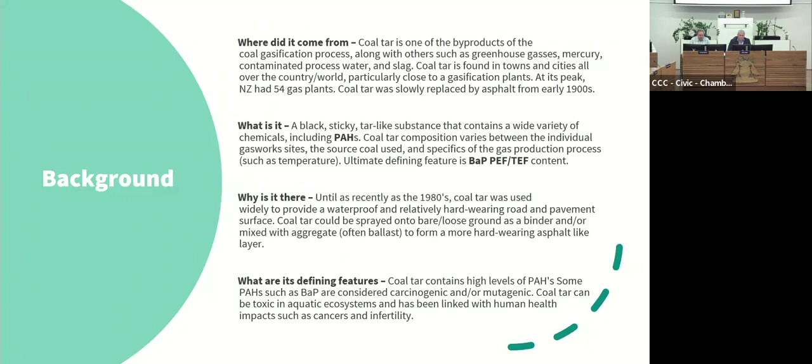So it's a very useful material. Unfortunately, it's not very healthy. It contains a lot of PAHs, which is the short term for polycyclic aromatic hydrocarbons. I'll touch on those a little bit later as well in Janine's section, but basically they're not very good for you.

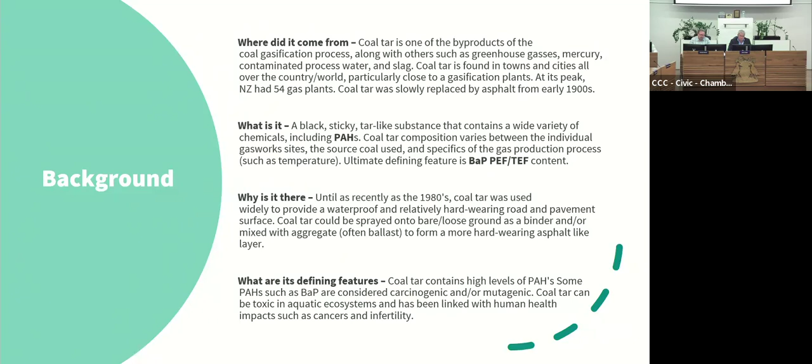The key defining feature of the strength of any given coal tar is its BAP content. BAP means benzoapyrene, which is a type of PAH. So I'll just skip on to the next page here - not with this. Here's a list of a lot of the PAHs that are found in coal tar. You don't need to read them all, the nuts and bolts of it is there's a big long list of PAHs.

So on the left is some of the constituent PAHs that are found in coal tar. The table on the right is representative of the most harmful fractions of PAH. So when we find coal tar in a road and we need to excavate it and dispose of it, at this stage in this country, the only way to dispose of coal tar at the moment is to put it into a landfill. And to determine which landfill we're able to send it to, we need to know how toxic it is. The measure of that is its content of benzoapyrene, BAP.

The figure there gives a calculation factor of the other most toxicant contents of coal tar, and they are added together to give a total which is called BAP, PEF, or TEF, which if you look at the table on the left-hand side, about halfway down, you can see there's a PEF and a TEF in brackets. So those numbers are what we look at when trying to assess how toxic, how harmful coal tar is, and then how we need to manage it and where we need to dispose of it.

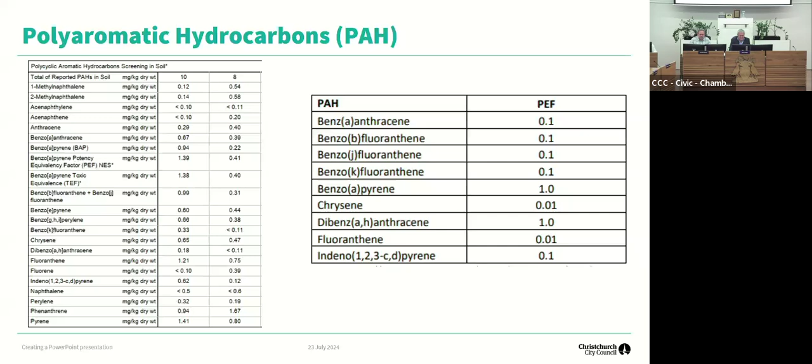So these slides are around the regulatory framework within which we need to manage coal tar. So what have we got? Coal tar, actually, that's an interesting point. Coal tar is a very strong compound, polyaromatic, polycyclic aromatic hydrocarbon. Hydrocarbons are made up of carbon and hydrogen atoms. And in a polycyclic ring is multiple, multiple rings of hexagonal carbon framework surrounded by hydrogen atoms, and it's very, very strong. It's very persistent. It doesn't break down very easily.

That's what makes it, I guess, such a contaminant of concern, is that it's very persistent. PAHs have been identified as being carcinogenic, mutagenic, genotoxic, and a reproductive toxicant, which basically means it can give you cancer. It can change your body at a genetic level, and it can affect people and organisms' ability to reproduce. Key point on this slide is that coal tar is referred to as a non-threshold contaminant. So there's no safe level of contamination. Any amount of contamination can cause problems in organisms.

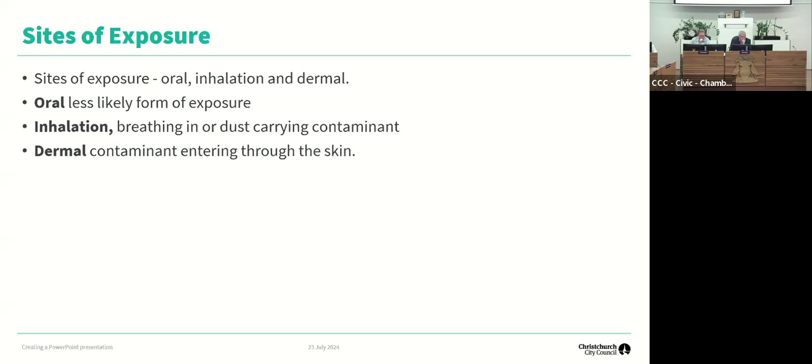From there, that small particulate matter can be ingested by filter feeders or adhere to plant life, which is then consumed by other organisms, and it bioaccumulates up through the food chain, causing issues we see in fish and other organisms such as tumors, cataracts, and fin erosion. It's easily absorbed in benthic environments.

This is where we're touching on how it's regulated. Under the Resource Management Act, for contaminated land, district councils issue resource consents for managing contaminated land. Christchurch City Council has issued a global consent to ourselves to disturb and dispose of coal tar where and when we find it.

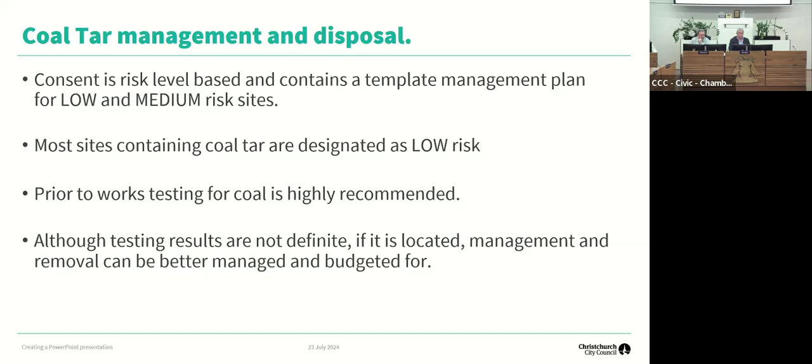Another regulator, of course, is Environment Canterbury. ECan manages, discharges, or authorizes and regulates discharges of contaminants to land and to water, or to ground where it may enter groundwater.

We don't have any—council does not currently hold, I don't think, any consents from ECan for any other options of managing coal tar other than disposing of it to an authorised landfill. So at this stage, our options are quite limited.

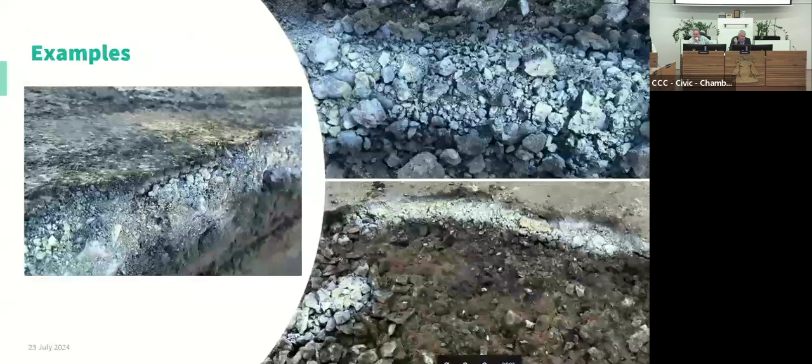So where you can see the white paint that's been sprayed on there, you can use an acrylic-based paint to spray on a surface where you suspect coal tar. If there's no coal tar present, that white paint stays white. But if the paint turns yellow, has a yellow discoloration, that indicates there's coal tar present. So it's a very quick test, and you can see in the photo in the bottom right corner where there's some yellow patches in the white paint.

So it's a very quick litmus test, as you say, of whether the coal tar is present or absent. However, that's purely presence and absence testing. You need to do laboratory sampling to determine the strength of the coal tar and then work out where you can dispose of it.

So I'm just looking at, say, that's on Innes Road, and you've dug down and found it, sprayed it with the white paint and there's little dabs of yellow there. Do we then stop, or do we have to send it away to get proper testing to know where to dump it? I'm just looking at how much time a road is open and we're not getting anywhere.

Again, a very good question. Thank you very much. In an ideal world, before we do works in a road, whether it's for the roading surface itself or 3 waters replacements, etc., we'll go along and do potholing into the road pavement to see what sort of materials we're dealing with.

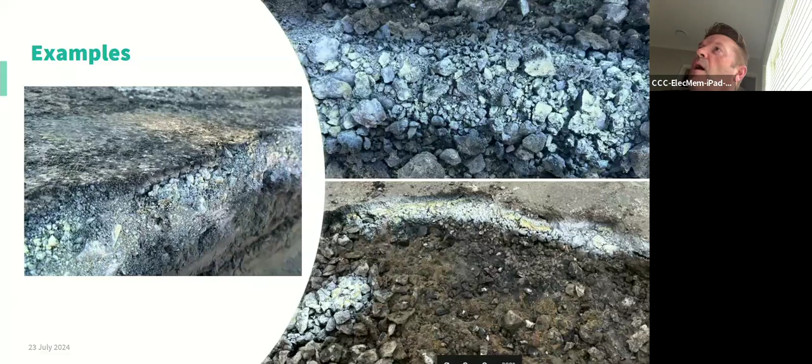Yeah, okay, I think I'm asking it wrong. Why have we gone to suddenly dealing with coal tar the way we do when it's only a potential link to cancer? It's not like asbestos where it's pretty clear cut - you can get asbestosis, but you can work with coal tar every day of your life and not get sick. That's true, but coal tar is a non-threshold contaminant, meaning there's no safe amount of exposure, like alcohol when you're pregnant - they have no limit.

Okay, I've got a lot of questions, and I'm really keen on getting down to the bit where you're going to suggest how we can play with it differently and save ourselves a fortune. Okay, Tim, yeah, thank you.

I was around when ECan did the HAIL sites, and that was an absolute dog. It seemed they just used old photos of market gardens, then went around and told everyone with properties in those old areas that they had HAIL sites. The angst caused in the community was horrendous, and we ended up doing more than ECAN to try and relax people. I don't want us to get into that situation. So how are we going to manage the concern this will raise - not a financial concern, but we don't want people suddenly running around saying 'oh my God, we've got coal tar being cut up in the dust.' So how are we looking at that? Are we going to talk about ways to relax it a wee bit, or what?

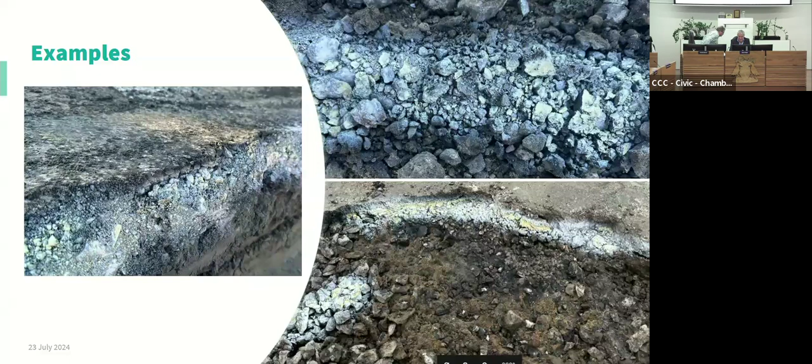Right, I'll try and whiz through these bits quickly. So Three Waters have given us some slides here, which are quite interesting because they talk about the cost of testing, which I think is partly in answer to your question. So they take a risk-based assessment to determine which roads need design investigation, and then they do that during design.

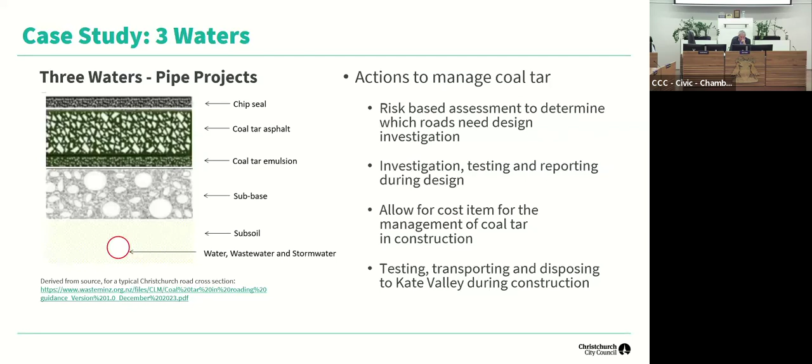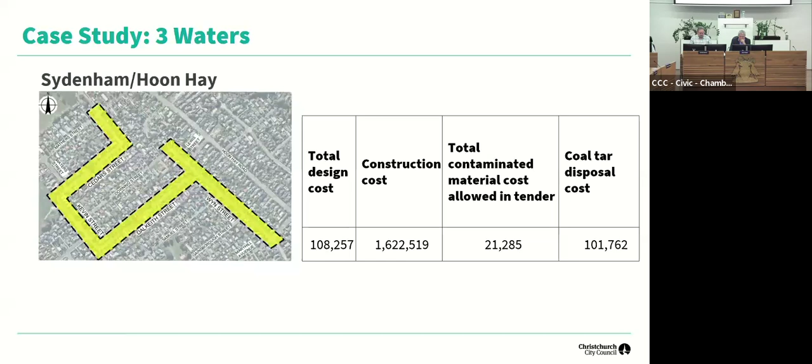The next one I think is really interesting because it covers the cost of the testing in design. In some of those, it's up to 10% of the design cost is the investigation of coal tar. So it's an expensive thing to do. It's not something you'd want to do everywhere because it will bump up the cost of every single job we do. It's just digging boreholes in the road as you go along before you start the job, sending it off to laboratories and so on and so forth.

So the risk-based approach is probably the best, but it means anything that's risk-based, sometimes you'll get it wrong. And that's the nature of taking that kind of approach, I think.

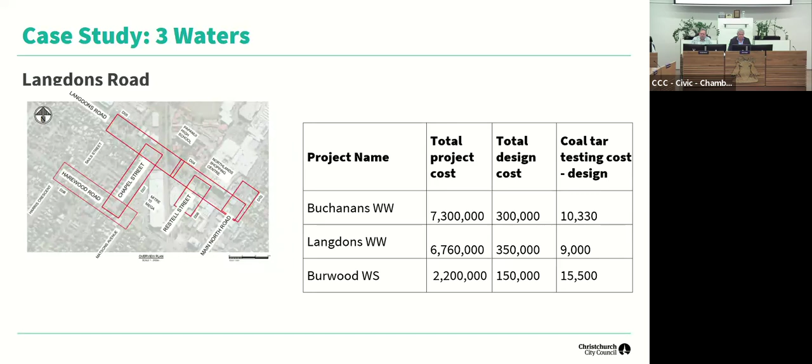So I'll go into Innes Road. This is a bit of a warts and all probably feedback.

Test pits and specification developed by designer. The sampling was poor. When we talk about sampling, we do test pits to find out all sorts of things - quite often we use them to find out where utilities are, and while we're there we test for coal tar. In this particular example, the people doing the sampling didn't take multiple samples, and because they were taking trenches in places where they were looking for utilities, these were obviously areas where the coal tar had been taken out already and moved away. So we end up with quite an unrepresentative sample, I think, in reality. Based on that, we thought we needed about $250,000 for disposal of coal tar.

Once they started working on the water main, they smelt it. We did much wider testing, and it ended up being about 1.3 million for disposal. We were somewhat up against the clock with this because we needed to finish the surfacing in the sealing season.

But what option did you have once you found it? Well, possibly that's the thing. But at that point, we could have come back and discussed it with you. But once you've opened up the road, there isn't really any other option than to just keep going, is there?

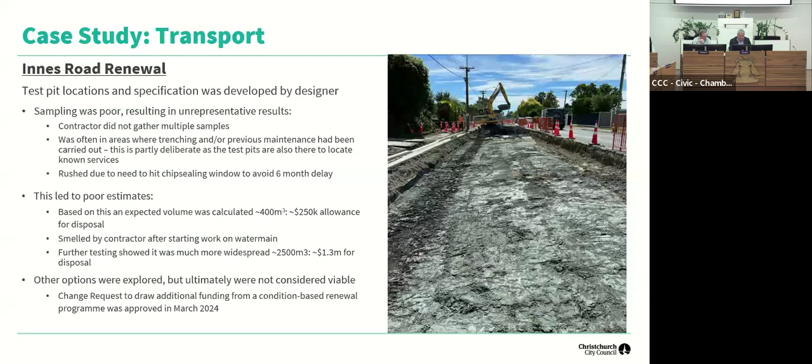So in terms of coal tar management options, there probably wasn't that big an option here. But the most obvious thing to do is, can you leave it where it is? Can you build the job somewhere else or do something else? It requires you to not end up disturbing it.

I've got Wheels to Wings at the bottom there. We've done extensive coal tar testing for Wheels to Wings, and we've found coal tar in a small number of areas, not particularly extensive. Possibly we can look at other designs for separators in that area so that we don't have to disturb the coal tar. So there are options if you can find it early and know where it is.

Can it be disposed of on site? There are occasionally some options to wrap it and rebury it. It's not really an option in a road because obviously they're utility corridors and people are going to have to come back and dig it out again at some point. But they are options in some other places, parks and so on.

You're only digging the road up because it's buggered, so you can't really bury it anywhere. Well, exactly, yeah. And it's probably only something you can do in relatively small scale as well.

Off-site disposal, location and cost. Mark touched on that earlier, but it depends on the concentration. It can go to all sorts of different places, some of which are incredibly expensive, some of which are even more incredibly expensive, to be honest.

So we've got Kate Valley. I mean, there's also the environmental element. Temuka is 3 hours drive away, probably more. So if you're taking large quantities, that's a huge amount of carbon to be pumping into the air. That's good.

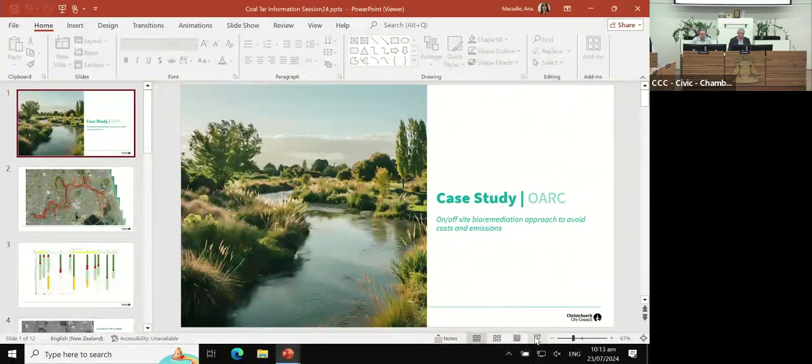So big problem and a massive problem for us in the OARC, as you would have seen from some of the slides. This one here is a wee bit hard to see, but I'm just seeing if I can move my pointer or this. No.

What the slide's showing is all the roads in grey within the red boundary are closed and stopped, and most of them need to come out for various reasons, either because we're putting in stormwater treatment or they're going to end up in the floodplain of the river. What that means is that if there's contamination in there, then you're going to have contamination there long term with a wetter and wetter environment. So you really don't want to be leaving these roads in place.

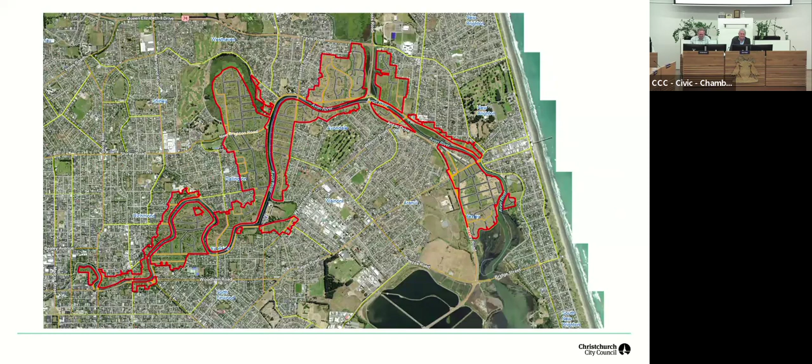Because of the age, most of them will contain coal tar, and pretty much every time we've gone looking for coal tar in roads of the correct age, we've found them. The yellow roads stay open, although we are looking at also closing some of those. So there's a significant amount of roading material all in one project.

Could that be a place where we could build a mound somewhere and put it all on site? It's not like digging a road, so that is a place that we could. And I think you've done that down at Pages Road. Yeah, well that one we sort of covered a contaminated site. We didn't necessarily set out to build a mound. So yes, sort of, I'll come to that.

Typically the coal tar got laid down in layers as people constructed the roads. They would have a layer of coal tar sealing material, and some base course, and maybe some more coal tar. Especially as roads got built up over time, you might find that every so often they used a layer of coal tar.

Then what happened in the earthquakes, particularly in the corridor but also in some other parts of the city, is that the roads slumped and wobbled around. Then to fix them, people came back in and put fresh material. So because they slumped unevenly, now our coal tar is unevenly through a lot of our red zone roads.

And that unfortunately means that you can't just scrape off layers and take them away. You've actually got to take that entire soil profile, because otherwise you're testing every 5 metres, trying to set up your machine to mill out 20 and then change it and then mill different. It just becomes crazy. So really at a broad scale, we've got to think that we're actually taking away about 0.5 metre of most of these roads as an assumption.

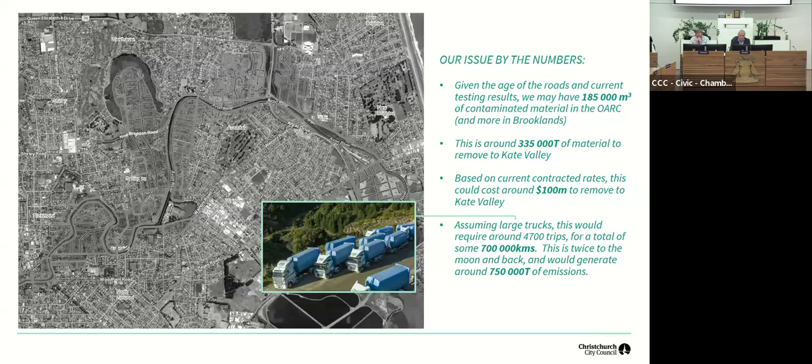Using those big trucks is about 4,700 trips to and from Kate Valley, which is about 750,000 tonnes of emissions, which we don't want to do, obviously.

One thing I love talking about because it's right up my alley: take the likes of North Haven Road. I know for a fact that one got all its coal tar carted to Dunedin because it was cheaper to do that than to take it to Kate Valley. So your greenhouse gas spread of trucks going miles away is even worse. Sometimes you can save a little bit of money, but then you have more emissions. So it's a bit of a trade-off.

The perils of the status quo, we're all pretty familiar with, but climate change is getting worse and we've got to treat it quite seriously. Construction contributes heavily to climate change, and if you're looking at the status quo project by project, like Innes Road, you don't actually have the time to step back and ask if this is the way we should be doing it. You've got to solve your problem - you've got coal tar on the road, you've got to take it to Kate Valley. That results in increasing emissions, coupled with the rates rises.

And those are all articles from the last 3 months, different councils around the country looking at their rates rises.

So what we're looking at doing in the corridor instead is bioremediation. The benefits: obviously we can save the costs I mentioned before and the emissions - not entirely, because it's not a free process, but significantly. It's a scalable solution we can use across the city, which increases those savings. It avoids landfilling useful material - it's actually great material, and it seems a huge shame to dump it into Kate Valley. It also means we can avoid having to expand Kate Valley or build new landfills.

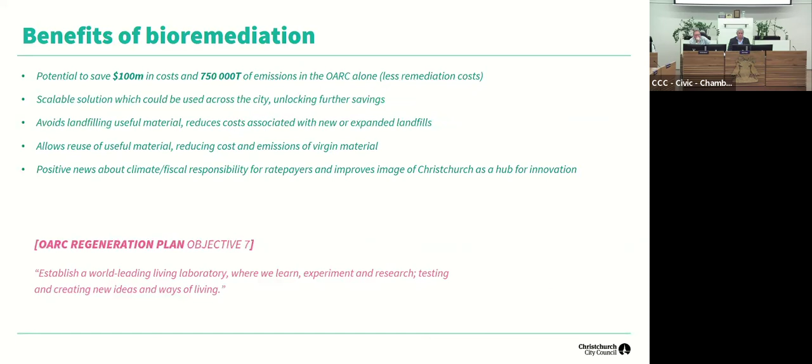They've identified a solution that they think could work based on a whole lot of science that's been done. Effectively, you take your contaminated material, mix it up with microbes and organic material - for instance, the compost we've got out at the organics processing plant. The coal tar, the way I understand it, is attracted to the organic material, so it naturally heads to those materials through chemistry, and they bind it and eat it and break it down. That takes a period of time.

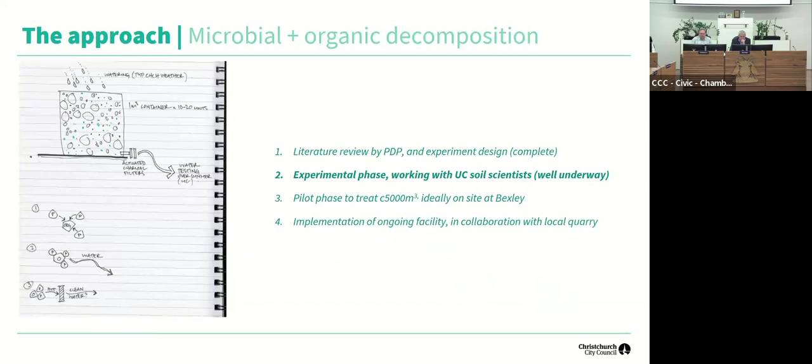We're working now with UC to carry out some experiments in their labs - that's well underway. The next phase will be a pilot phase to treat about 5,000 cubes, which we've tagged Bexley as the site for. The final phase, we think, would be to set up an ongoing facility, probably in collaboration with a local quarry or a local asphalt plant, someone that's got a bit of space. We've had some initial discussions with some suppliers, and they seem reasonably interested, but it depends on timing.

So two really important questions for this: one is, will the water runoff be clean? Because if the water comes out contaminated, it becomes quite a hard thing to manage.

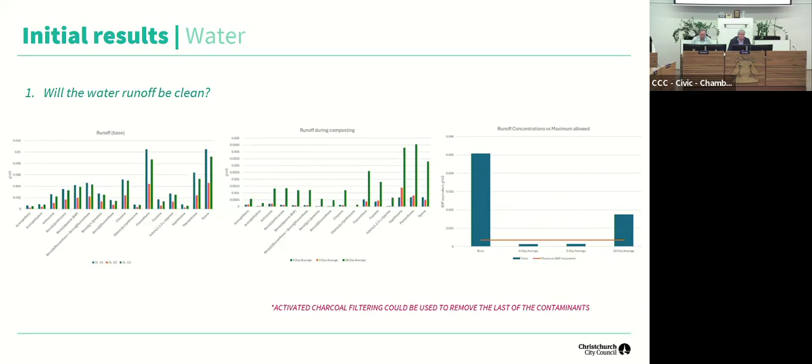It's still not zero. So what we're thinking is that to get it much closer to zero, we should be able to run it through activated charcoal filters, which should get that last little bit of contamination out, without being overly expensive to do. So the water's looking quite good, we think.

However, there are some cautions, and it is still preliminary data, which is my next slide. What we have to do now is have our scientists modify the experiments and make sure they can verify the results.

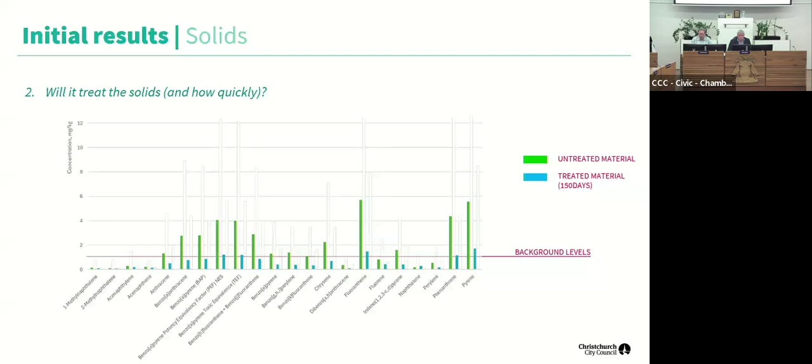What they're really looking at, going back to the previous slide, you can sort of see some ghosted lines there. They did 3 experiments. One of them worked really well, 2 of them worked quite badly, and two of them actually spiked the levels. They think they can replicate the results and they think they know what went wrong in those other two experiments. But what it does show is that if you don't do your process right, you can actually make the problem worse. So that's the next key phase, making sure we understand why those ones did that and how we avoid it.

So we've re-engaged with ECAN. They were initially very supportive of this project.

And the next steps - we're setting up a contract with PDP to consent our pilot project at Bexley, along with a soil phytoremediation project, because this is only one of our contamination problems in the red zone. We've also got contaminated soils.

All going well, we hope to have them both up and running this summer. The caution, as I said, is 2 of the 3 experiments did spike our levels. Not all of our results are under the baseline yet, and we really need to get to a point where we know how long it's going to take to get them under the baseline.

Because that affects how viable it is as an off-site commercial activity. If we can get a process that gets our base material down below background levels in, say, a year, that probably works for a quarry. But if they have to hold it for 5 years, then that's just way too much for them. So that does speak to the commercial side of things a little bit.

And the last one is that even though ECAN are supportive generally, they don't really like the idea of us doing an on-site pilot at this stage. So we've still got some work to do to convince them.

Sorry, that last sentence - they don't like you doing it where, sorry? On-site. So the idea of taking our Bexley roads and moving them to the high dry ground and setting up a controlled pilot - they don't love that as much as they like the idea of taking it completely away somewhere and doing it off-site. But you could do it on top of the old Bexley landfill, which is full of rubbish anyway. Is that where you were hoping to do it?

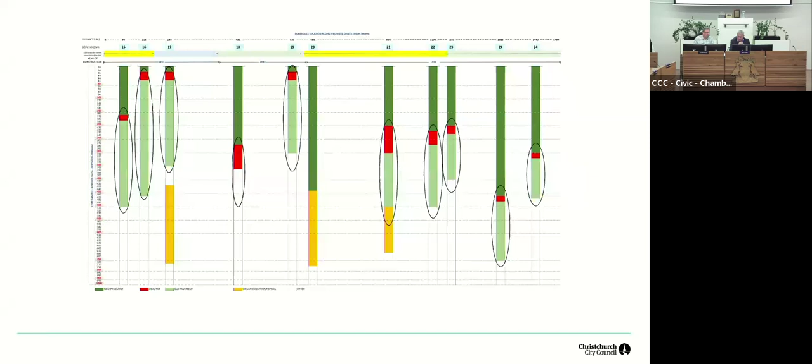Picking up on an action, Phil - when we've got our next governance to governance thing, should we also be raising it with ECAN around getting support for what we're doing at a governance level? Probably inform them, but it's our problem, and we sort of just tell them what we've done to sort it - it's up to us to sort our problem. I can certainly raise it with my counterpart there because at a governance, GM level, we run 3 monthly meetings. It's a good idea to try and do the on-site trials rather than cart it. But the key takeaway, as Victoria brought up, is to just keep the community boards informed as this goes through.

Then it goes back into their areas. The unfortunate thing with this one is they tested, but of course where they tested it hit trenches, so it didn't show. Just before we get into the next one, the likes of down at Hobblestone Drive in the red zone - I know those roads when they were built, and they were all just done with gravel. There was no coal tar there, so you'll find there'll be nothing there. It's not because it's a newer road.

If I could hold my way through this - Phil, with the community boards, can we just get this really, really good information, the video, circulated? Yeah, sure. This is specifically to community board members? Yeah.

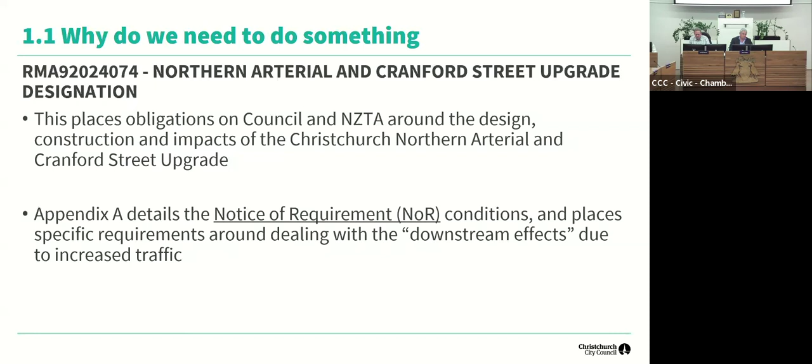But for us, it mostly deals with the downstream effects of increased traffic to the suburban areas. Our legal obligations are that we have to mitigate the traffic effects, appoint an independent expert who's a qualified traffic engineer, engage with specific stakeholders, and carry out ongoing traffic monitoring for 10 years. Particularly, it specifies a 30% increase in local roads as a trigger, at which point we either need to improve the operation of Cranford and Sherborne Street or install traffic calming measures to mitigate the impact. I'd point out that it says mitigate the impacts - it specifically doesn't say to reduce the numbers, it says to mitigate the impacts.

The independent expert developed the DEMP, the Downstream Effects Management Plan. It leans heavily on traffic modelling, trying to predict what it would look like and identify the key points where traffic would build up and the local roads that would be affected, then put in place measures to deal with that impact.

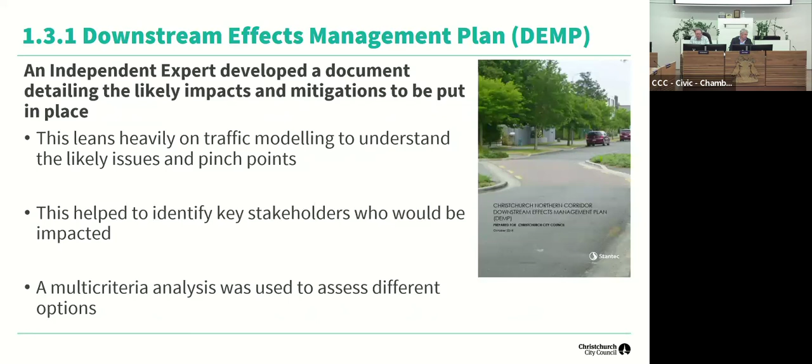It's quite an extensive document if any of you have ever read it. It broke down the DEMP into 3 stages. Stage 1 had to be in place before the opening of the motorway. Stage 2 had to be implemented within 3 years of opening. Stage 3 could be undertaken any time between the opening and the end of the commissioning period, which is 10 years from the opening of the motorway. It also talked about doing that progressively and iteratively - putting in place something, seeing what happened, putting in place something else, seeing what happened.

The engagement decision-making has been in a huge number of stages. Originally we went out and asked for views. That helped the independent traffic expert develop the draft DEMP. That then went out for consultation, came back. It says there council endorsed the DEMP, which it actually didn't endorse.

It acknowledged the legal requirements that it put on council and instructed staff to carry out stage 1, which was improving the flow along Cranford Street and changes to a number of intersections and various other bits and bobs - which I think we've done now, all of it. That was considered by joint meetings of the 2 community boards, who then made a recommendation to council.

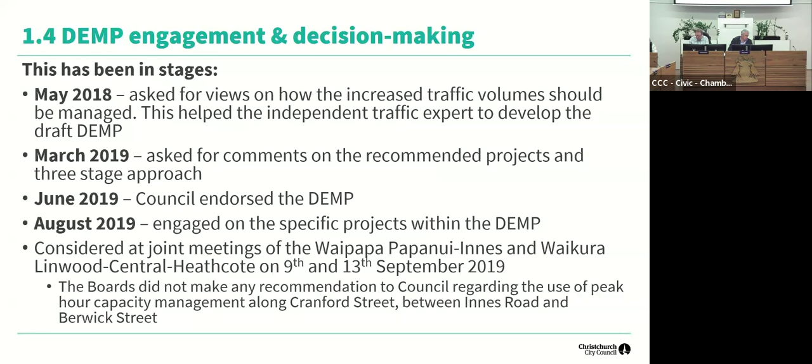There was no recommendation regarding the use of peak hour capacity management from the community board at that time. So prior to CNC opening, there's a whole load of works there.

In terms of dealing with DEMP generally, probably the biggest issue we now have is related to the closure of Forfar Street at Warrington Street, which has put a lot of traffic onto Flockton and Francis. We've been dealing with the community board over a long period of time, there's been lots of trials, and there's a report coming to them already. So that's been resolved for us to do work on Flockton and not Francis due to feedback.

And Innes Road, which we've discussed — DEMP made a contribution to that because it has deteriorated since the opening of the motorway, and it's seen a significant increase in heavy vehicles.

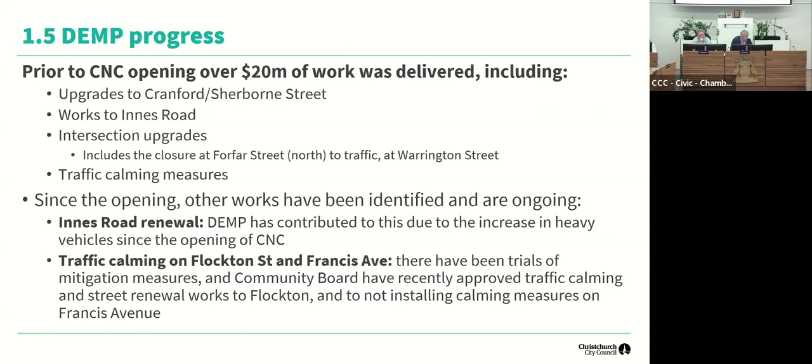The Clearway proposal was part of the DEMP, but that wasn't supported by key stakeholders. The community board resolved not to install peak hour capacity management, or recommended to council not to install it. Council didn't endorse this and approved a 3-month trial of bus lanes back in November 2020, which has been extended over and over again and is now in place until March 2025.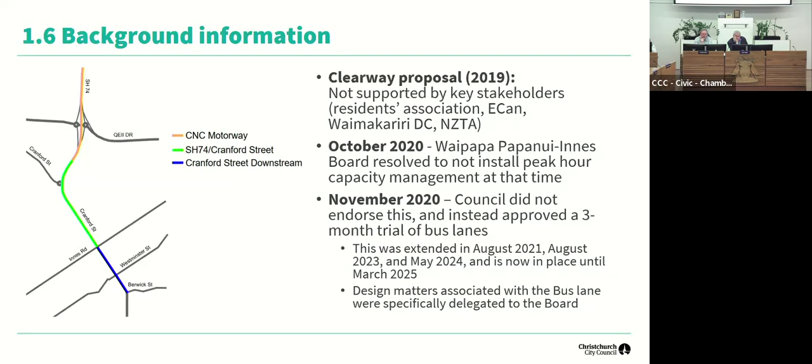Design matters associated with the bus lane were specifically delegated to the board, but the council holds the delegation for special vehicle lanes. So anything the community board recommends will come back to council if it's a special vehicle lane — bus lane, Clearway and T2 all are.

They're all our decision. They go to community board, but then they come to council as a part A. Because we do get a number of things here that I'm not happy with, and I go, oh, I can't do anything about it because we've given delegation to the community board.

So is this one of them? No — ultimately the special vehicle lanes have to be approved by council. But the stuff related to that isn't.

So, it's a very quick background to CNC and DEMP, and I'm very happy to stop and take questions on that if you've got any, or I'll move straight on into Cranford Street. I was going to say I can either stop or carry straight on into Cranford Street and what we're actually coming to talk to you about. Okay, do the next bit, sorry.

We have investigated a number of options, and what we're looking to consult on is peak hour bus lanes, peak hour clearway, peak hour T2 lanes, and what we're not consulting on is the T2 extension all the way from the motorway down, or an urban arterial, which is effectively what it looks like now but with parking where the bus lanes are.

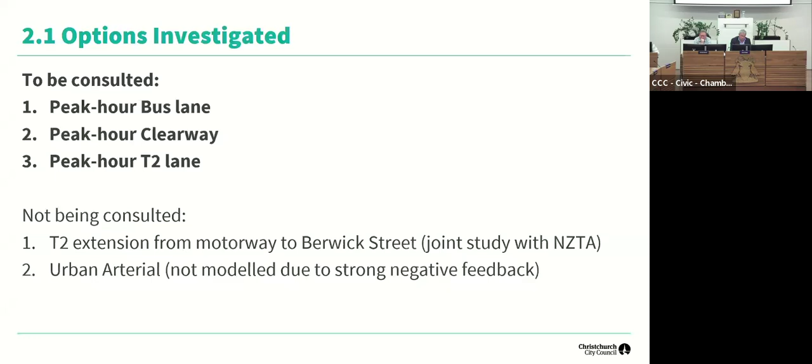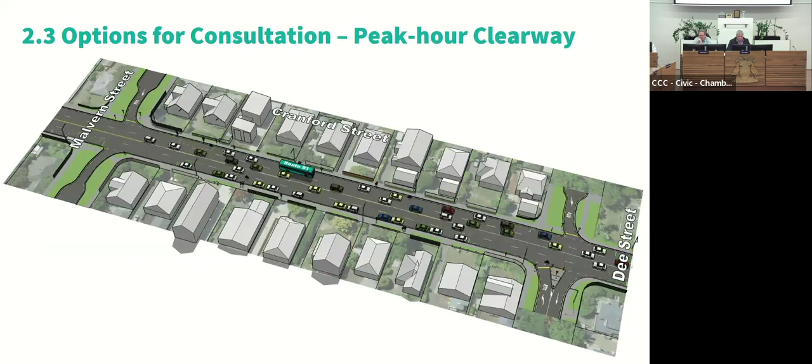The clearway would be for all traffic at peak time, and it would revert to parking outside of peak hours. So the same peak hours for buses at the moment will be the same hours for clearway.

Advantages of that: it would improve traffic flow and save time for all traffic, and we'll come back to that at the end because there's a little table later on. Disadvantage is that buses would obviously stop at stops in the general traffic lane, on-road cyclists would share the lane with traffic during peak hours. It's considered the least safe option, and we believe it may attract more traffic and single occupancy vehicle types.

In terms of buses stopping in the lane, the express buses from Rangiora and Kaiapoi don't stop here. So it's just the 27? Yeah, 27.

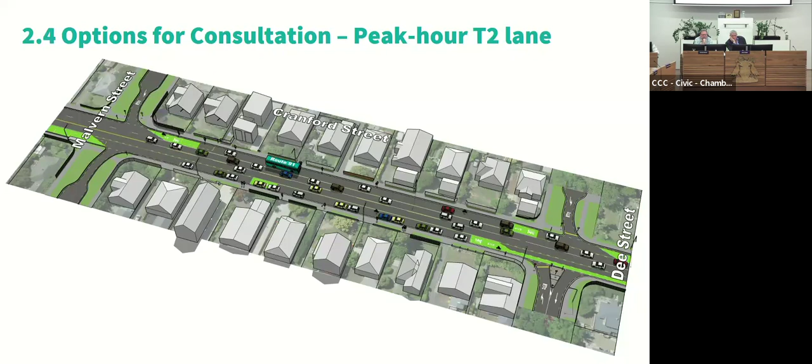And the T2 lane is for vehicles with 2 or more people in them, and they can use that. Advantage is it has travel time saving for all traffic and encourages ride sharing, which should reduce overall traffic. Disadvantage, again, you've got the inline bus stops, cyclists share the lane, and it requires special enforcement techniques, which we believe is a solvable problem, but it's not something that's been done in Christchurch before, and it may take some time to get in place.

The other issue is that on the motorway at the moment, the T2 lane is on the right-hand side, and the T2 lane would need to be on the left-hand side here. So if you drove down the motorway, whether on the left or right, at some point you'd have to switch over. Is T2 being enforced on the motorway at the moment? I don't know. We were asked by the community board to get an assessment on the safety of that, which we have done, and I think the general feedback is they don't believe it's a massive problem.

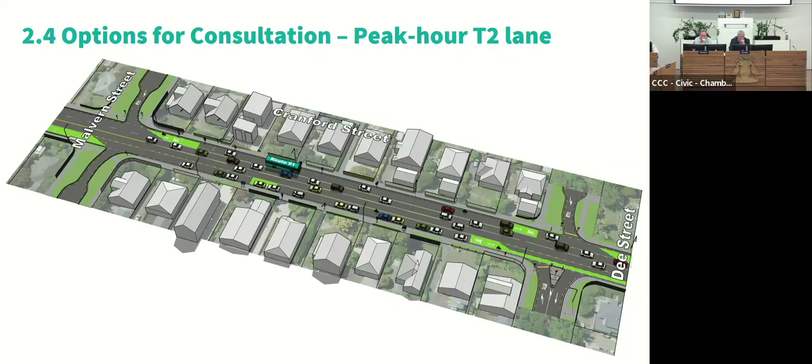So in terms of that lane shifting, there's a slide on there. Basically, it's that bit that everybody has to shift across - whether you're in the right, you have to move to the left, or if you're in the left, you have to move to the right, and everybody's moving against each other.

The T2 extension is that we join up the 2 bits of T2. We initially thought this was probably quite a good idea. We did some modelling - the issue is around the roundabout. You get traffic that comes down from the northern part of Cranford Street that joins the traffic, which creates quite a lot of congestion. The modelling shows it would then push people to go down QE2 Drive and come through the suburbs, which goes entirely at odds to the whole point of the notice of requirement and the DEMP. So that's not being consulted on because it doesn't meet the requirements.

Additional potential changes that we are also consulting on at the same time include some increased off-peak on-street parking spaces, safety improvement at the Cranford-Westminster intersection - that was in the press about 6 months ago, there was quite a bit of stuff on that - and an English Park signalised crossing. So a few safety improvements there, which is mostly high friction surfaces.

We've had discussions with the governance board, Mark Stevens and Emma Pavey. They're keen to end up with something that isn't inconsistent, so they're keen to resolve Cranford Street first and then come back and do these afterwards, so that whatever decision you end up with on Cranford Street, the decisions on this fit with it. So it will be done in 2 stages effectively.

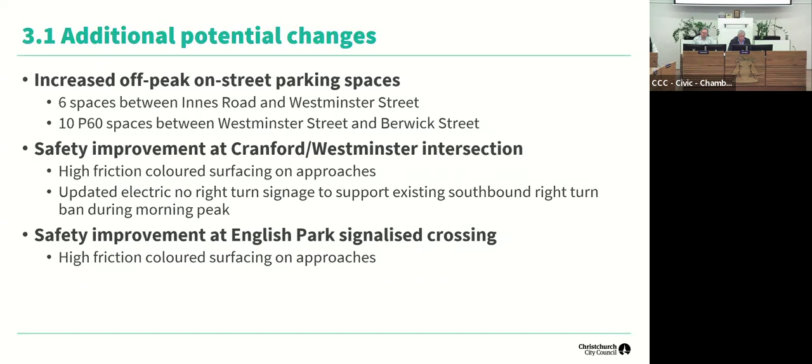We looked at other things - safety improvements around that area which are not being taken to consultation - around raised platforms, red light cameras which have enforcement issues, and Barnes dances that create congestion issues and so on. Traffic modelling is really where this probably comes down to, and it's those top 3 on each of those that we're going out for consultation on.

However, ECAN are looking to increase services. So on 91 and 92, currently scheduled for year 3, so in about 2 years' time. But in the morning peak, it's only 27 that would stop. It is only 27 that would stop, but also the point is people are using it because it's a fast route into town, aren't they? So the speed for the 91 and 92 is still important, even if it doesn't stop there. But yes, agreed, they're the only ones that will stop there.

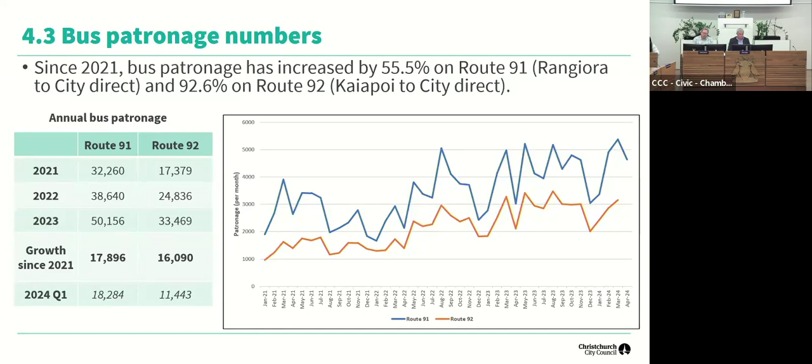Bus patronage numbers for the 91 and 92 have increased quite significantly since it was started. We sort of discussed this before when we came back to do the bus lane, extend the bus lane trial - but they're the numbers. Yes, they were sent to us from ECAN.

Cool. In terms of the consultation, we are planning to start very soon, from the 29th of July to the 26th of August. The tactics for this consultation have been designed to target the local community, schools and community groups, affected properties and businesses, previous submitters, bus users and emergency services. We got some feedback around the technicality of the information - it is quite a beast of a project - so we are planning on hosting an online webinar to target wider audiences, which also provides a recorded video to make the technical information accessible for everyone.

We have a very wide spanning online marketing campaign that will target anyone living in the local area, but also all commuters who drive through Cranford Street. We're also working with the Waimakariri Council and Environment Canterbury to make sure our messaging reaches North Cantabrians. In terms of what to expect, submitters can give feedback on each option, and they'll also be ranking the options from their most preferred to the least preferred.

This structure has been shared during the information session with the Waipapa Community Board, who supported this approach.

We'll also be offering a quick poll option for those who are time poor or prefer not to share personal information. We've found this highly effective in recent consultations, such as Marine Parade and the long-term plan, and the results are consistent with formal submissions. In reporting, we'll also split results to help you understand who we're hearing from, e.g. submitter location and modes of travel.

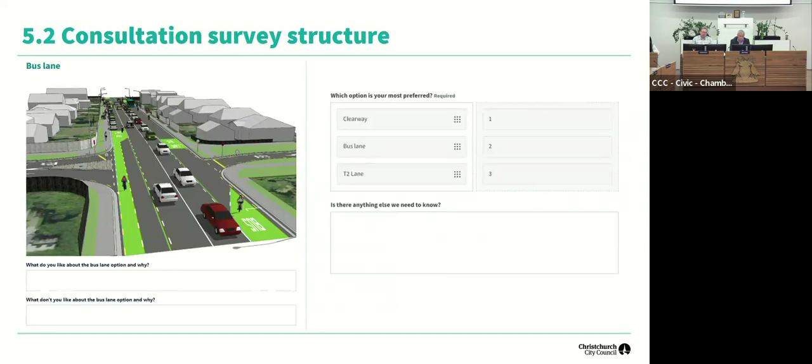Post consultation, we're looking to come back to the community board, and then, as I said, the decision-making process is the community board makes a recommendation to council. So council will ultimately have to approve any special vehicle lanes.

All done? I'm all done. Oh, good, hang on. No, that's good. So just to be clear, you're going out with the 3 options? Yeah. And the way you've just explained it, like you did with Marine Parade, it's actually very simple. Okay, that's good. Right, so we've got Victoria.

Can I just take you back to the peak hour clearway? You said the express bus doesn't stop, so only the number 27 is going through, with 6 buses during peak times. How many bus stops are there on the stretch of road you're consulting on? There are 3 bus stops on either side of this section. Will that information be included in the consultation material? Yes, I think so.

Thanks. Thank you. Yanni, Tim. Yeah, cool, no, I was just wondering - there's been a lot of infill housing in this area, and I think we bought some land for the road widening, on Innes, I think it's Innes and Cranford, where we bought the kids' bakery. We bought the land on the corner, I think part of that.

Okay, right, so if I go back to the very beginning - they are our legal obligations under the notice of requirement, and that's what we have to meet in order to not fall foul of our legal obligations.

Excellent. Good answer. Right, Timothy. Thank you, just three quick ones.

With regards to the clearways, T2s and bus lanes, Colombo Street south of Moorhouse Ave works really well - we've got a clearway in the morning and evening. Also Lincoln Road through the township, presumably carried through to NZTA's roads at Halswell. Could we get some stats on the improvement of bus times on Lincoln Road and Colombo Street? The whole reason they were put in was that people weren't using buses because traffic congestion was holding them up, so we took parking out in the morning, the more important time for getting to work.

Both in Lincoln and Colombo Street, and we've got clearways in the evening as well. Lincoln Road we can get you data for. Colombo Street is slightly different in the way it's enforced, so it's probably not that comparable, but it was also built into the modelling that was done. We've been able to get data on this one because it's been running - that's part of the time-saving modelling shown in the table.

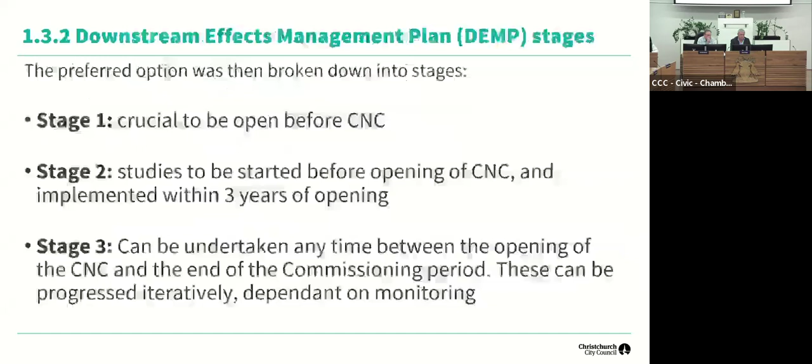No, I'm totally for both - Lincoln and Colombo work really well. Just be good to know the improvements, so when we're talking to people we can actually verbalise that.

The second one is on slide 15. Sometimes we get documents from people that are overly complicated - I've just been to court this morning and yesterday, and if you want antiquated complications you should sit there, it's ridiculous, but we won't go there. Where it says concerns may cause driver confusion and potential violations and potential collisions - whatever we do has to be as simple and clear as possible, because we sometimes focus on the mechanics, but the stupidity of drivers cannot be overestimated. So whatever we do, it's got to be as simple as possible. Thank you.

Okay, sorry, Melanie. So in terms of mitigating traffic effects, what are those? Is there somewhere listed what exactly that means for that first point - mitigate the traffic effects? That can mean lots of different things in different places.

In some places it can mean we need to get the traffic numbers down, in others it might mean getting speeds down. On Flockton Street particularly we've had vibration and speed issues, so what the community board has resolved is to put in speed humps effectively and rebuild the road, which reduces the speed and the vibration issue. So it's difficult to say - it's not necessarily about getting numbers back down to where they were, or even below that 30% threshold. It's about dealing with the adverse impacts of that.

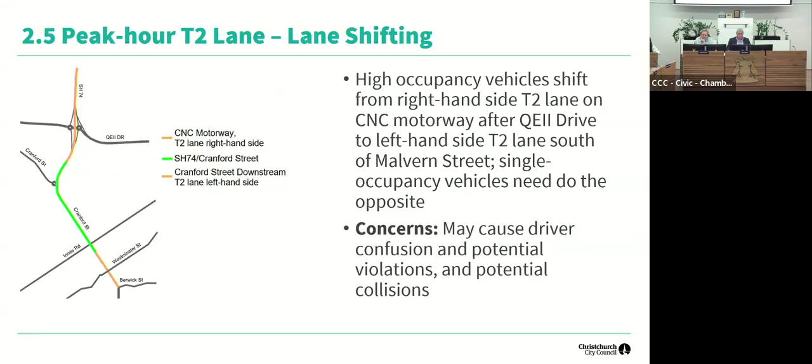Yeah, so again, as stated before, anyone who drives, buses, cycles, or walks down Cranford Street, there's a geolocated targeting that will reach them. Great. Then the other one is on the first slide.

I think it was the first, or 1.2 or something, right at the top. It says appoint an independent expert. Why would we do that?

Oh, that's required by the notice of requirement. Yeah, but last time we did that, we just ignored them, because the Shane Turner report, the council tossed out and did their own thing.

It's still an obligation for us to meet under the notice of requirement. So whether you decide to take up his opinion or not is your decision, but that is an obligation we have to meet under the notice of requirement. Oh yeah, no, he wrote a really good report.

We just ignored it. And I didn't agree with all aspects of it, but the majority of the report was good. Then the other one is, it said something about no speed platforms along there, or they're not being looked at. But did I hear recently the community board signed off on putting one on Cranford Street anyway?

Yes, there is one going in on Cranford Street by McFadden's. So that's going ahead, is it? Yeah. So now we seem to be contradicting ourselves, that we can't put them in elsewhere, but we can put them in there.

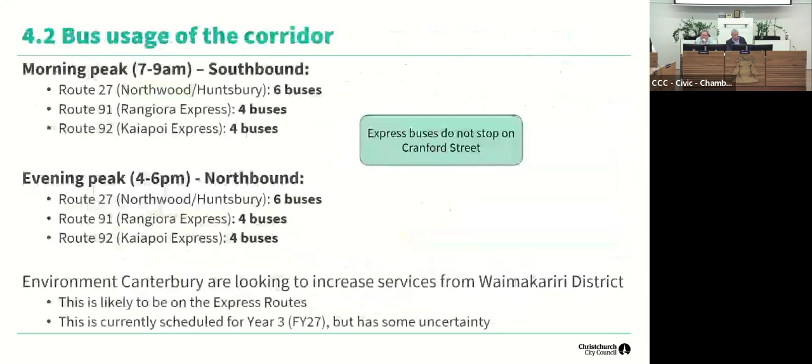Thank you. Can I go back to the traffic modelling data contained in the table at 4.1 of your presentation? Can I just check, is that pure modelling, or is that based on the data that has been collected since 2020 on the trial? Pure modelling. Pure modelling, yeah.

So given that there has been a trial, there's been a number of trials over the few years. Oh, it's not on Cranford Street. It's on Sixth Avenue and Flockton Street. So I'm talking about the trial, the bus lane trial. That's on Cranford Street. Have we been collecting any data about that during these trial periods, and where can we see that?

We asked for the data from ECAN, however, they changed their system and couldn't provide recent data. We did have data at the beginning, but with their staff change and system change, they could not provide those data.

So have we got any material from, I mean, we've already had a trial period going for four years. So where is the material and feedback from that to feed into what we're doing now?

Well, I think the operation of the bus lane would be similar to the modeling results. The modeling shows that buses would travel faster than normal traffic. However, the bus travel time would be similar among the options.

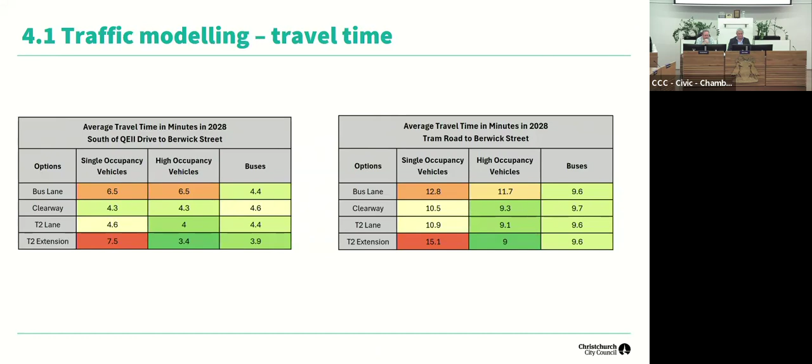Forgive me, I'm not trying to catch you out here. What I'm just trying to clarify is, I'm hearing different definitions and different actions related to the NOR. Now, I live on Westminster Street. If you put that map up before where you show where this is going to affect, Westminster Street is right there near Cranford.

As you will know, if you live and work and play in this area, you have congestion basically right up from the turnoff to Papanui, sometimes up to Edgeware Road at peak times. So that road is a dog's breakfast. The decision this council makes is absolutely essential to us who live in that area. It's unsafe. My son was hit and nearly went under a ute as he was riding a motorbike down there.

So that's why this notice of requirement is so important, to understand what it means, what the legal obligation is, and what it requires you to do. Because I do not want to see things done in this area that are not required but are down to interpretation. I think that has to be made really clear to the people making the decisions around the table.

One other question I have, with the clearway as opposed to the bus lane, can you explain to the councillors the main differences to how the road would operate at peak times and non-peak times? So if you were looking at the clearway option versus the bus lane option - if you drove your car down it, you could go in either lane and keep going, and that's the basic point of a clearway.

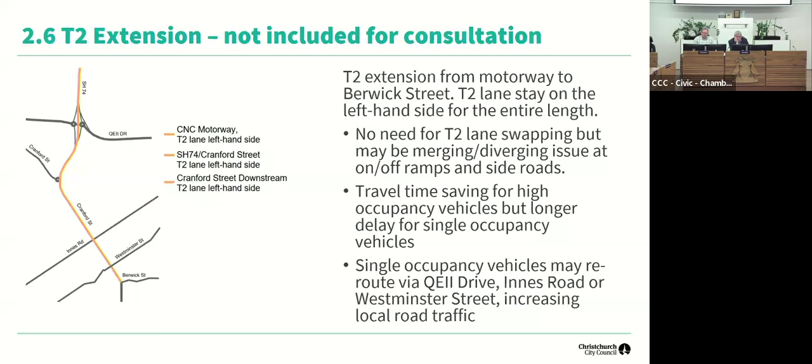So there is no parking, they are two traffic lanes. Right, and that means it's all day, every day?

Is it a 24/7 thing? No, it's a peak time clearway. So outside of peak time, that will revert back to parking.

So the bus lanes at the moment are timed, right? Yeah, they're peak time only. One last question: the bus lanes cannot be used by traffic outside the bus lane times, right? No, it's parking. Well, if there's no parking there, can you drive cars in there? Yeah, if there are no cars there, yes.

Do you have any plans to communicate that to people? Because at the moment traffic is backed up in one lane from Innes to Westminster on Cranford, with an empty lane and no cars parked down that bus lane. People don't use it because they think it's a bus lane. Have you ever thought about doing any public information campaigns explaining to people they can actually use them?

I need to be clear, we need to come back and check that, because it is not a traffic lane outside of peak hours, it is a parking area. So we need to be clear on any advice we give in relation to the road rules around undertaking, so you can't drive down. I'm not giving you any advice, I'll come back on that one. We'll have to come back on that.

Because it is not a traffic lane outside of peak hours, it reverts back to a normal trafficable street. Okay, but what's important is that you've explained that regardless, it's a one-lane street, Cranford, right? Yeah, I mean, that's, yeah, okay.

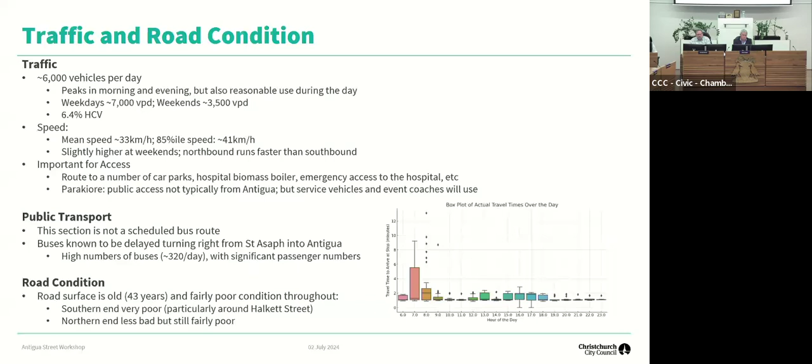Cycling, it is identified as a key link between the city and the hospital, between the Quarryman's Trail and the city. The cycle counter on Quarryman's Trail is only one way, so it only picks up cyclists going north. But it has a rolling one year average of over 500 cyclists, so equivalent to about 1,000 cycles a day, we think, along that bit of Antigua Street.

The modelling that was done initially reckons that should about double over the next 20 years. So that's what we'd hope, is that would increase over time, although it is continuing to grow rapidly at the moment. There is a known issue at the northern end where cyclists go onto the wrong side of the road.

And then cross over St Asaph on the right-hand side of the road. So they come up Antigua on the left, swing over to the wrong side of the road, and then cross over to get onto the shared path.

Yeah, they go across on that barn dance thing. But instead of waiting, because if you're cycling north into town, if you sit and wait there, you have to wait for quite a long time for the phasing to let you go diagonally. Whereas if you go the wrong side of the road, which obviously I've never done, you only have to wait for the lights to be red on St Asaph and you can go straight across and carry on into town. So we know that people are doing that. It doesn't seem to drive many accidents, but it's a known safety issue in that area.

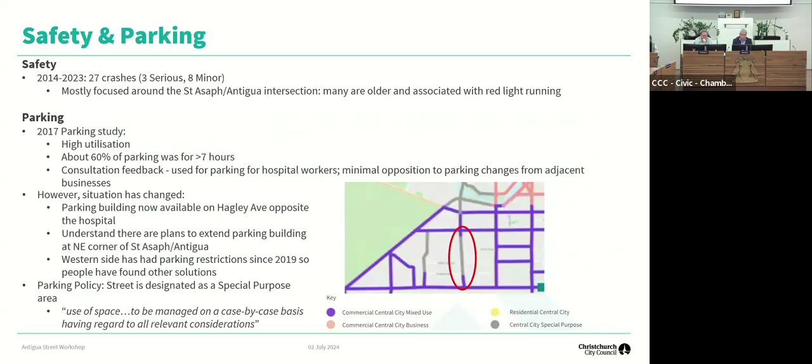Probably overstepping the mark a little bit, but I don't think that timed parking really solves a problem there. Every business there has its own parking, and long-term parking is available. So, I mean, that's for you to decide.

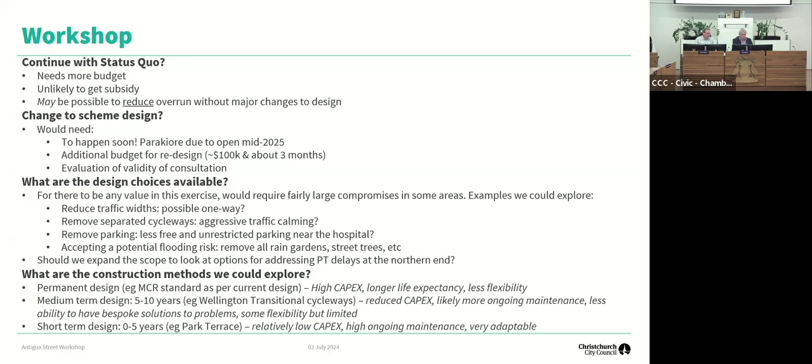Thank you. I don't see any point in redesigning it, but I just think there's a couple of things. We now in the area have 2 medical research organisations, and we also have the Pacific Medical Centre. So that's been a change. So it is actually important to have some parking in that area, because both those medical research places are really important for our economy, and it's expanding, and at a very high level, high finance, if you like.

And the second one is the intersection with St Asaph and Antigua. The barn dance, you've got it horizontal, and I can't remember what slide it is, but you've got it going from Parakiore to the hospital parking, the elite parking area, if you like. I think it should just be both ways, because looking at it, people aren't using it at the moment, because obviously the hospital's rebuilding their corner where they had their coal boiler. But it may as well be a barn dance, because it is at the crossing, and it works really well right across. So I think you just make it a barn dance.

Yeah, I mean, it effectively works as a barn dance anyway. It stops all the traffic for that phase. Yeah, no, it's working. There's a significant number of cyclists that go diagonally, and with the opening of Parakiore, that'll probably become even more, so it may be that it's quite uncomfortable to go diagonally the other way. But yeah, it just depends what the hospital does, but I think we may as well make it a full barn dance, it just seems logical.

But I just think that the design you've got, that's fine, but it is just, if anyone was kind of saying about taking the parking out, now that we've got the 2 medical research units and the Pacific Island Medical Centre, I think it's really important to retain some parking.

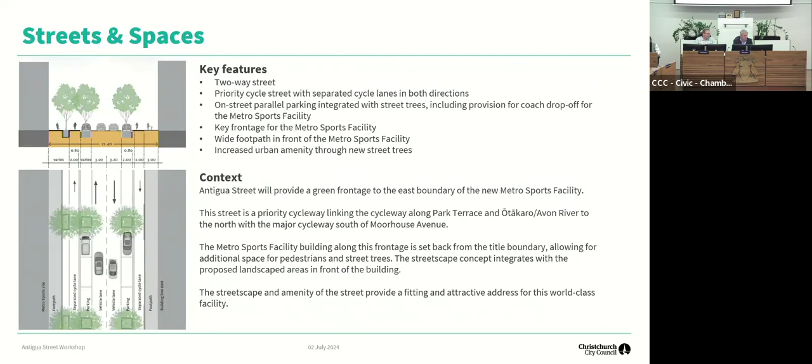No, in process of. Okay, so now that we've got that extra land there, have you considered a dual way cycle lane on that side of the footpath beside Metro Sports, in exactly the same design as you have at the city end of Antigua, where you've got the dual lane working, and the footpath beside it? Have you considered that design as another option along this piece?

So bi-directional, looking at that one - sorry, this is probably the best graph I've got to show, it shows the whole thing in one go. So bi-directional on the bottom of the picture, on the western side, is what you're asking. So if you're cycling from town to head south, you'd go on the eastern side, then cross diagonally, go down that section of Antigua on the western side, and then at Moorhouse you'd have to somehow cross back across because it's unidirectional on the southern side of Moorhouse. It becomes very complicated to cycle.

But you've got the crossing point already on the diagonal across at St Asaph and Antigua Street, so you're anticipating the cyclists are crossing there already. But they cross if they're heading north. If you're heading south, you head straight down the eastern side of the road as it stands at the moment.

Have we got other areas in town where cyclists are required to cross intersections? Is this unique, that if we travel on the west side of Antigua on a dual cycle lane along there - and I see you've got a raised platform - is there any way you could make some facility for cyclists to cross back over?

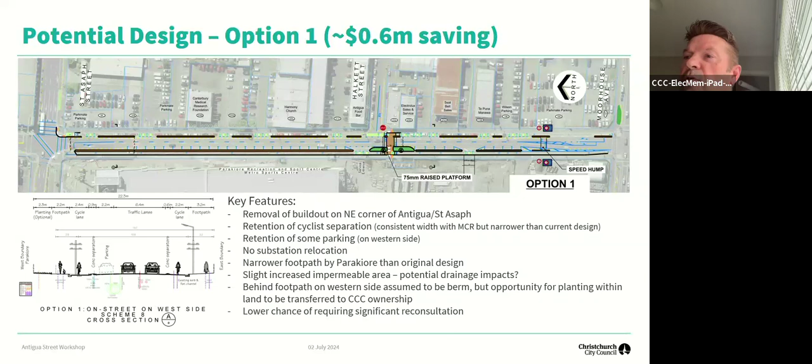No. Okay, right, thank you Aaron. Jake? As local councillor, you'd expect me to want the full fat option, so I'm happy with status quo. But I think Tim actually made a really good point. When the government gets away with spending whatever their final bill on this one will be, $6 billion, $10 billion, who knows, actually spending 3 or best part of 4 on a complete street redesign is actually pretty good value for money, really.

Sorry. Sarah wants another one. Tyrone.

Thank you. So I cycle that route every day of my life, twice a day, and once you get past Moorhouse Avenue going northbound, it becomes very, very tricky. But it is the superhighway of cycling in Christchurch, absolutely. Now some cyclists, definitely not me, do swing across Antigua Street, and it's probably the norm rather than the exception. So with the current approved design...

They won't be able to do that because of the separation, so it's going to be very difficult to do the swing. With the alternatives, is that still possible? Are you less or more likely to be able to do the swing with the alternative design? It's still separated, so it'd still be a physical separation. So regardless of the design, in theory it motivates cyclists to remain on that.

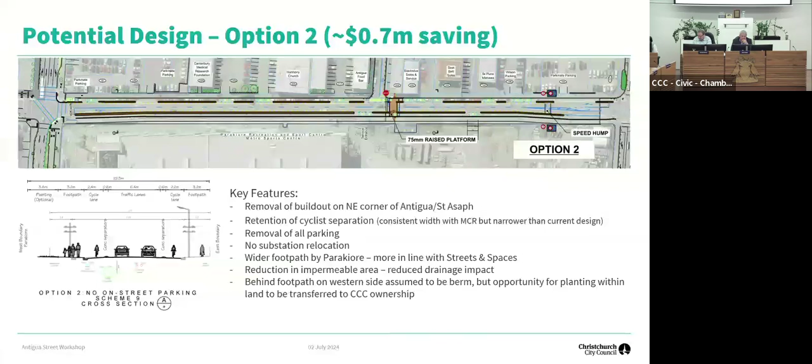Can you put it back to option one, please? If we came down here from the boat sheds, across on the Barnes Dance, and went all the way along to Moorhouse Ave on that side with a two-way shared path for cyclists and pedestrians, all the way down St. Asaph Street to Hagley Park, we could leave the eastern side of the road totally alone and keep the car parks there that already exist. Have the western side with all the car parks that are already there. The only issue is getting across — which I thoroughly agree with — from the double cycleway at the Moorhouse Ave end to link up with the one-way bit that carries on south. Somewhere along the line we should be able to do that. Cyclists aren't daft, they're not silly. I reckon we could easily save $2 million doing it like this. So that's what I'd like someone to look at, please.

Anyway, we have Victoria's question. Can I just get some clarification on the consultation issue? I sort of lost the thread of the conversation — do we or do we not have to consult if we redesign this?

Going back to Sarah's point, we didn't have to consult on some other issues — oh yeah, okay, it was the whole nine yards on this one. Okay, and it is confirmed: there is a legal requirement for us to reconsult if we go back and redesign it. Yes, and depending on how much we redesign it, that depends on the level of consultation we need to do. But yes, I think it's fair to say we need to reconsult — that's the bit I was missing. Okay, can you go back to the current design?

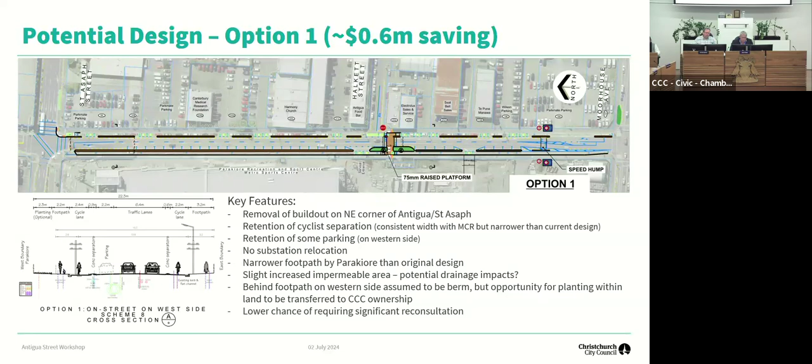Can you tell me where the school buses will park? Often we have lots of schools going to our swimming facilities, and when we have tournaments and things on, we have lots of people arriving on buses. Where is it anticipated that the buses will park and offload? Within their car park. So it has to be in the car park? Yeah, there's no intent for them to use Antigua Street. Okay, thanks for that.

Okay, can I just go back to the coal tar issue? I know we dismissed it lightly and you said we'll just cross our fingers. Given the conversation we've just had, this is a real issue. You said you've done a lot of prior work in this area. Is there any information available? Oh yeah, there's huge amounts of information. We've done an enormous amount of testing on this road to get to the point where we are with this design.

So it wasn't just a flippant comment, crossing our fingers - we have a level of confidence, informed by the fact that we've just had a very long session on coal tar. And that comment has been informed by the data you've already got available. Yes, there's been extensive potholing along this road, all sorts of things.

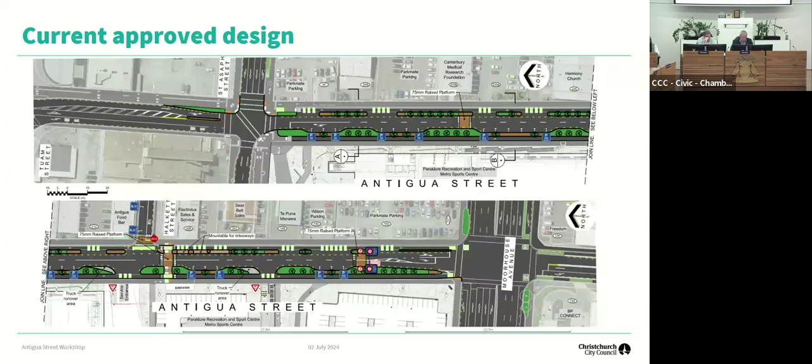So can I just go back to the cost of inflation on one of your slides? Let me see where that is. Which one is that on? It's just before the current approved design. Okay, there we are, got it.

So one comment made has been that if we delay this and go back to redesign it, and have to go back up to consultation, it could push the cost up further. I'm just unsure how that really fits with the comment we've made at the bottom on inflation. I just can't reconcile it. It's me trying to manage - there's a lot of uncertainty around this.

We have seen quite a lot of increases in tenders over the past 2 or 3 years. We're starting to see that come down a bit - contractors are fighting hard, and we are seeing tenders come in under their estimate. With inflation coming down, we could reasonably assume that a further delay doesn't necessarily mean the cost will increase.

Thanks. Okay, now what we've got to do - I know we've got a couple more questions - is give these guys a steer on whether they go back and redesign option 1, option 2, or Phil's option 3. We're getting into a workshop and debate here before we know where we are, and we're getting nowhere fast. So I'm just letting people know where we're at.

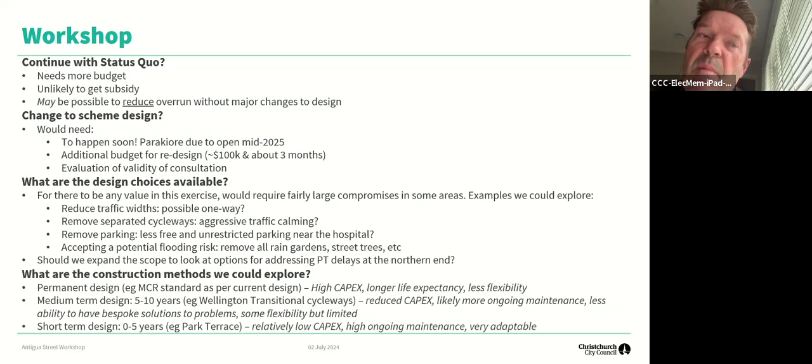Because if you look at it, there are very few free car parks in the area. Low-income people will walk blocks and blocks because they have no money for overnight car parking. Okay, we're getting right into it here. Donald from Cashmere.

Yeah, hey, thanks for that, mate. I went to school in Woolston as well, mate.

Sarah: Kia ora, couple of things. Firstly, the opening of Parakiore, and while that's been delayed somewhat, what impacts would it have if we were in the midst of doing roadworks here when it opened?

It would be minimal. We're at the back of Parakiore, so the opening will be on the other side, and we could definitely stage it with the contractors to work that and make areas available. No, I mean just generally with the operations, not on the actual day of the opening. I don't believe they access it through there.

No, but it had always been planned, like I said, to tie that in. Richard and now Anne will manage that, thinking about the people interface anyway, accessing it and those kind of things. Yeah, okay.

Going back to Victoria's point on the potential for tenders to come in lower, and you've also mentioned on one of the slides that it may be possible to reduce overrun without major changes. So what are your chances, if we were to go out for tender now on the approved design, that the tender coming back lower and other minor changes would mean the cost overruns didn't mean we needed to redo the whole thing?

You're putting words in his mouth. The position we're in is that under council's procurement rules, we can't go out and tender something when we know we don't have enough money to deliver it. It's not fair on contractors to put them in a position where they're tendering for stuff we don't believe we could ever build. So we kind of have to be in a position where we have the budget available, or at least earmarked, before we go out to tender.

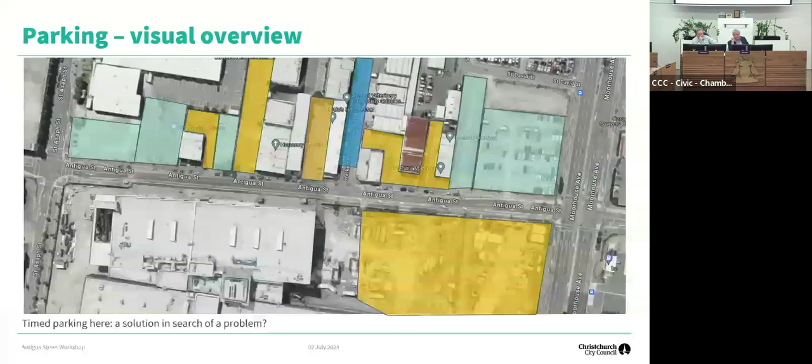How much is on budget? 3.5? Redesign. Oh, sorry, off the top of my head, I can't remember, it was in one of the early slides. Roughly 3.6, something like that. So it's 4.5, so we're 900 short, and none of the 3.6 is subsidised. So the whole lot is coming from us.

So when we went out for consultation, did we say that we were going to get probably 50% from NZTA or not? All I'm doing is asking, how much do we, the ratepayers, have to pay? That's all. So thank you very much.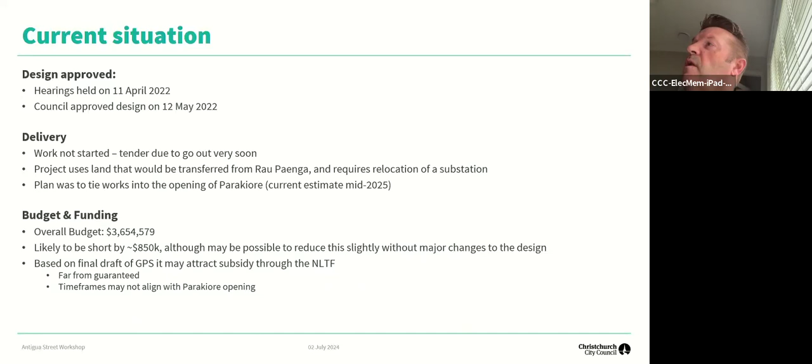I heard it was 4 people. If only you couldn't get more of your mates to turn up to the job, Aaron.

Mayor Phil, can we not hear from Lynette on whether there is any merit in this coming back in September? Yep, Lynette. Yeah, agreed, I mean, it can be done, and we can do that, can't we? It's about 6 to 8 weeks delay. What does that impact with you, Jacob? My concern would be that we'd still be building it when Parakiore opens. If we don't start the design, we don't have to have got that far through the process, but the more we delay it, the more we're going to be up against Parakiore opening.

Yeah, but let's have a look at the date of Parakiore opening. That is a movable feast, and there is no guarantee this is going to be opening in November. If you look at the history, it'll be well beyond that anyway.

If we're redesigning, if we get to sort of 6 to 8 weeks and then decide to redesign, yes, that's a delay. But if in 6 to 8 weeks we just find the budget and go with the current design, that's actually still likely to get us in time for Parakiore opening, right? Yes, I think that's the key thing. I think go ahead with this, rejig the transport budget a little bit.

But one thing we mustn't lose sight of, because I walked down there the other day, the kerb and channel on the Parakiore side of the road is absolutely stuck from everyone driving in and out. It needs to be replaced. So we should replace it as close to our new boundary of land as we can get, and utilise as much of the free land that we're getting. But that's just my opinion.

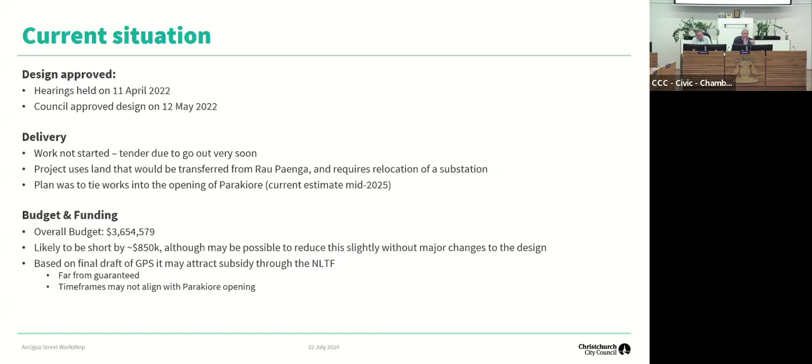There's probably a reasonable argument, I think you alluded to it, that you do minimal works just to make it look reasonably nice, then do a temporary solution and see what it looks like in 2 or 3 years. That's probably not an unreasonable approach, but obviously it's not for me to decide. Cheers, my favourite. Okay, thank you very much.

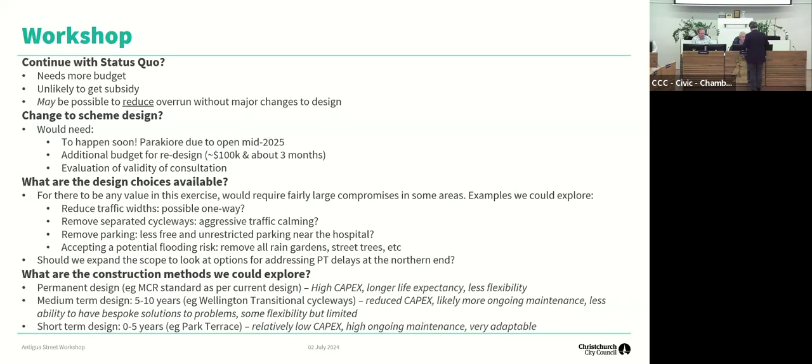How's your wee girl, mate? Yeah, good.